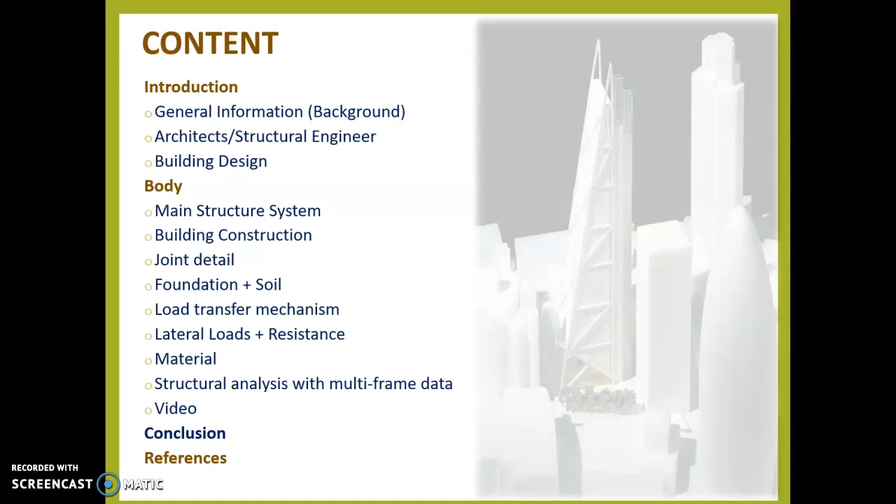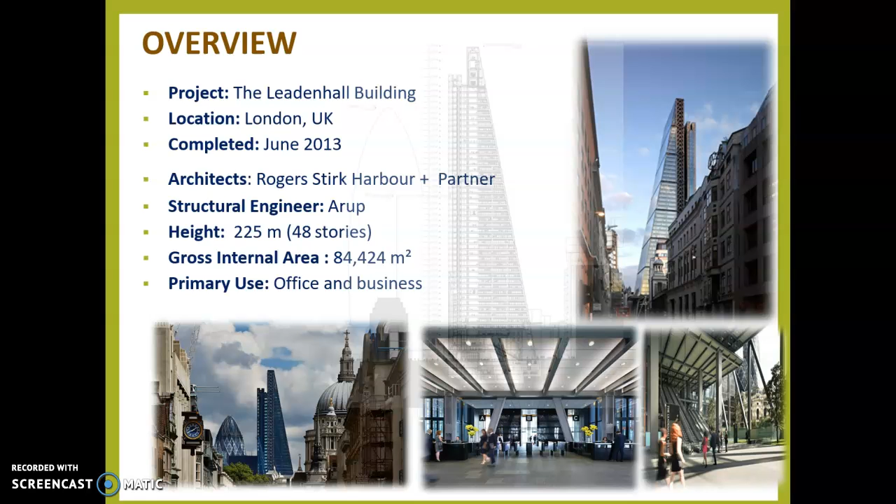It contains the introduction, body, conclusion and references. The project is Leadenhall Building, located in London, UK, completed June 2013. Architect Rogers Stirk Harbour + Partners, structural engineer Arup, height 225 meters, 48 stories, gross internal area 84,424 square meters. Primary use is offices and business only.

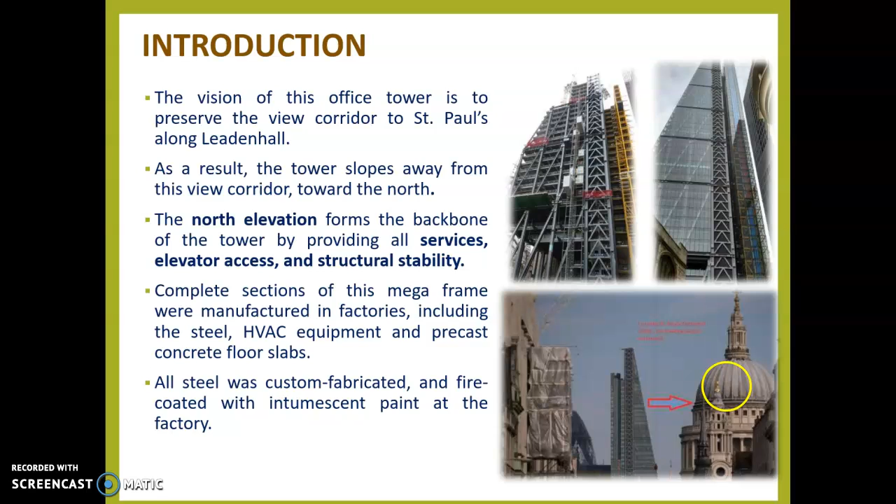The introduction includes the north elevation, which forms the backbone of the tower by providing all the services, elevator access, and the structural stability. The vision of this tower is to preserve the view corridor to St. Paul's along the Leadenhall. So you can see this is St. Paul's, and this is our building.

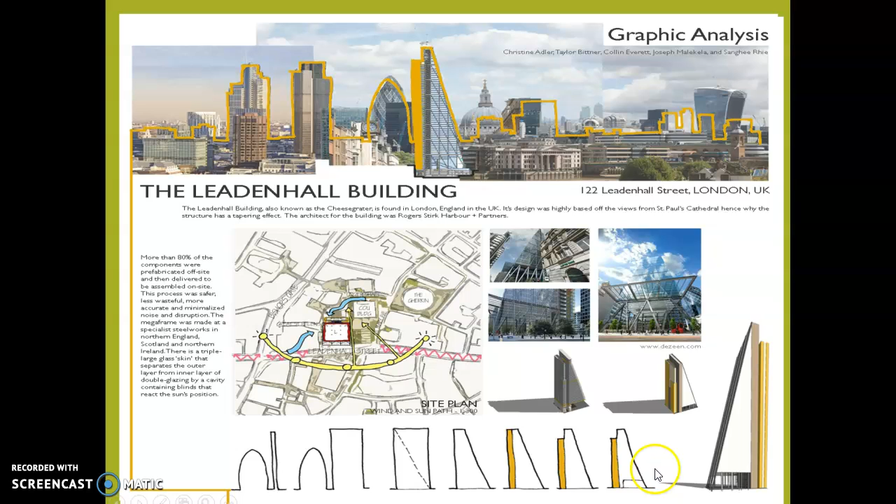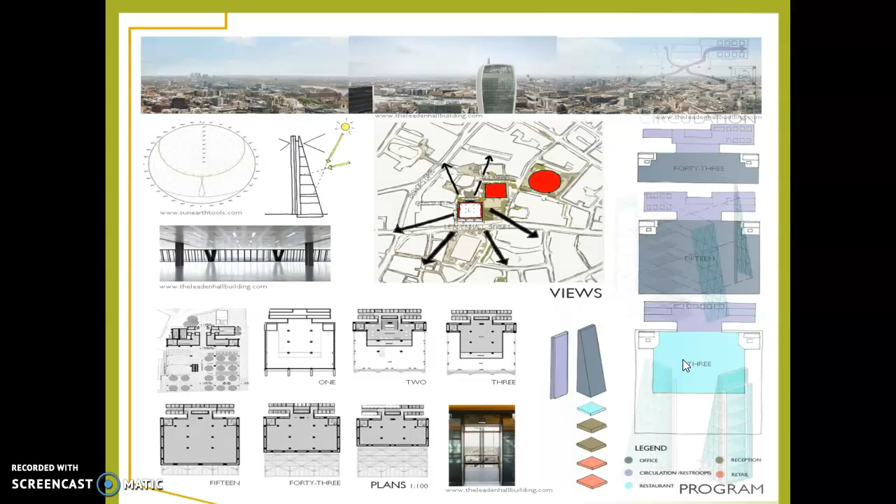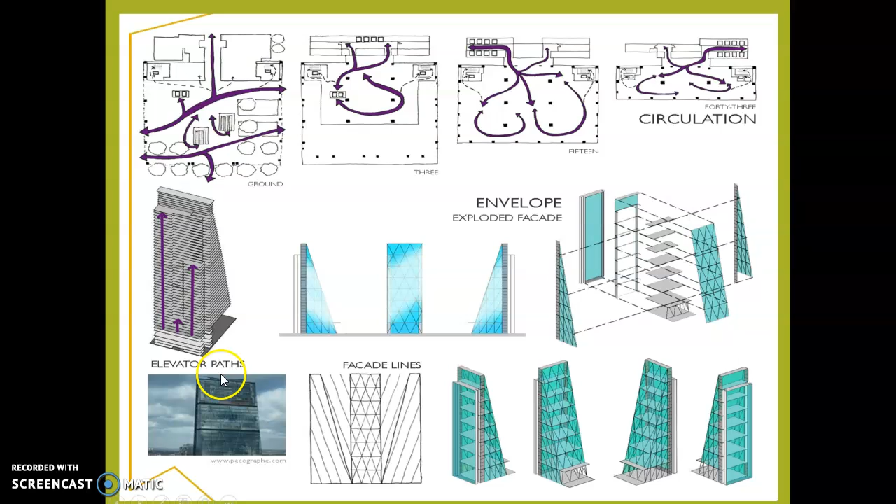This is the exploded facade of the main building, made up of glass and steel. This is a 3D view of it, and these are the elevator paths, like lifts, and the movement of the lift moving upwards. All this glass facade is used in it.

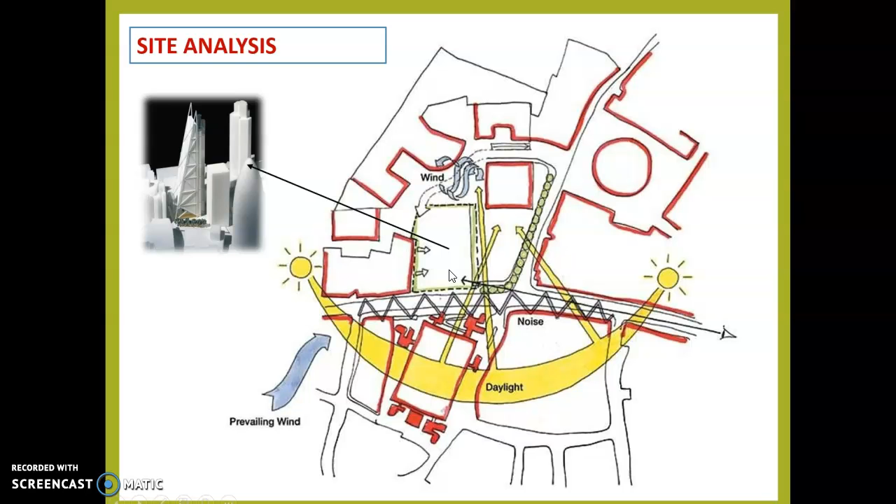This is a site analysis showing daylight and prevailing wind, and this is noise coming in and striking towards the plants situated here, which reflects back to sound. This is the main model of it.

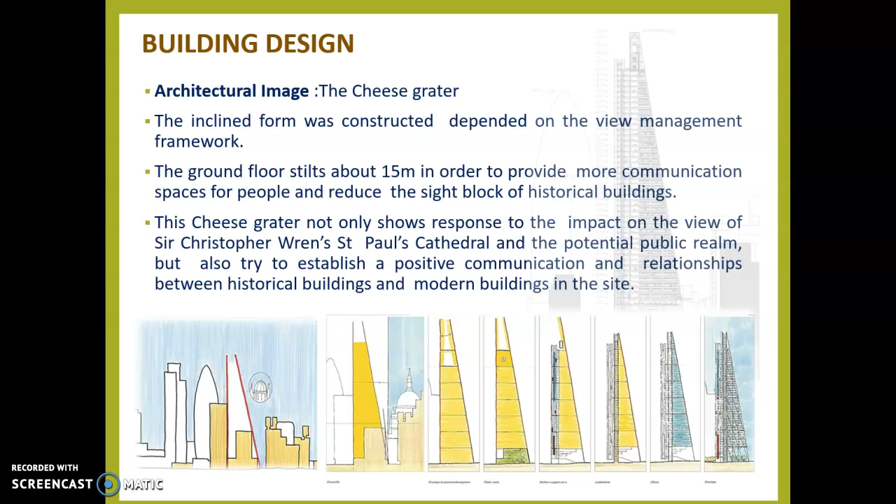Talking about the concept of the Cheese Grater, it has a simple concept that evolves into trapezium shapes, leading to the structural analysis. It has potential public realm but also tries to establish a positive communication and relationship between the historical building and the modern building on the site.

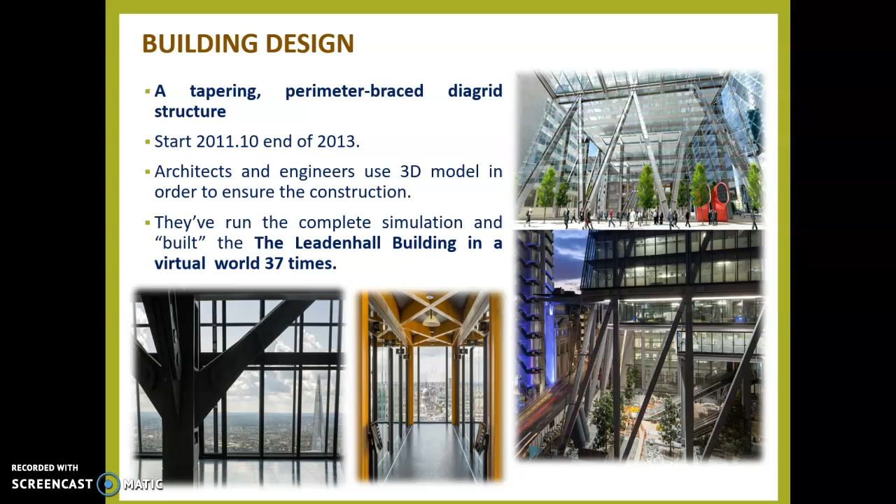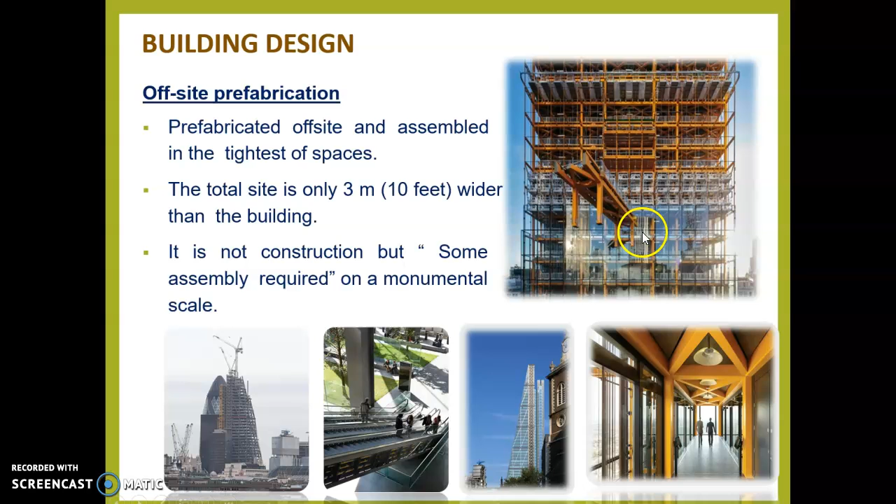Offsite prefabrication is included. The total site is 3 meters wider than the building, giving it a tough, monumental scale.

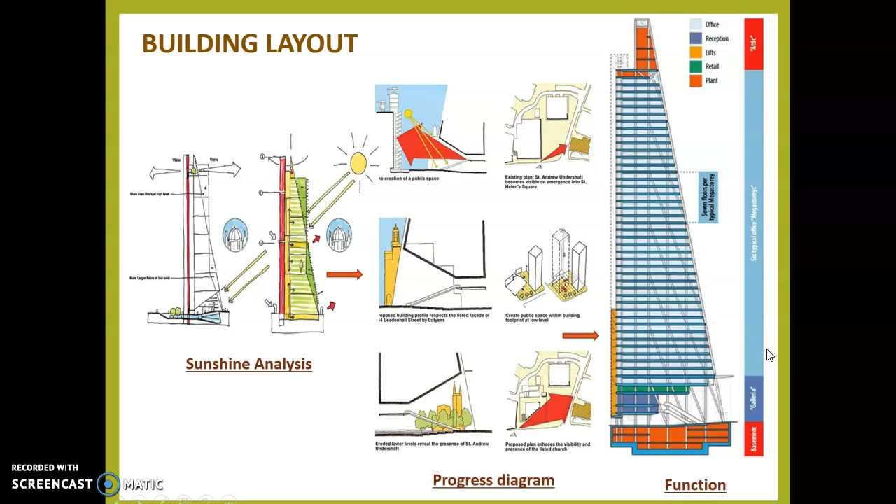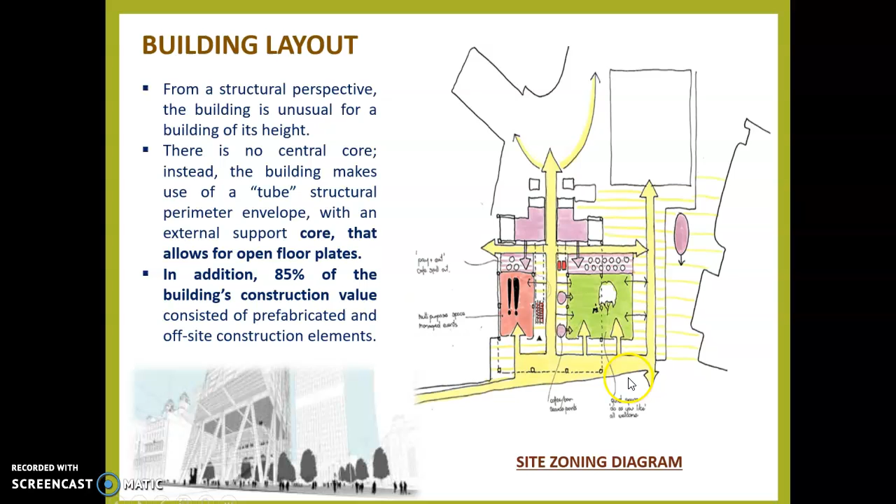This is the site zoning, showing a cafeteria area and a public multi-purpose hall, with a cafeteria for sitting together. In addition, 85% of the building's construction value consists of prefabricated and offsite construction, as discussed in the previous slide.

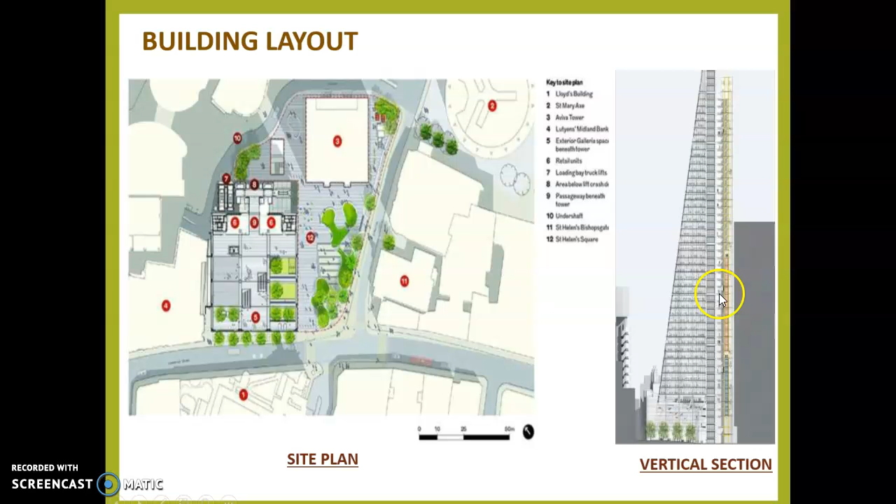This is a site plan, and we can see a vertical section showing the monumental structure core, the north core, and all the buildings included in this.

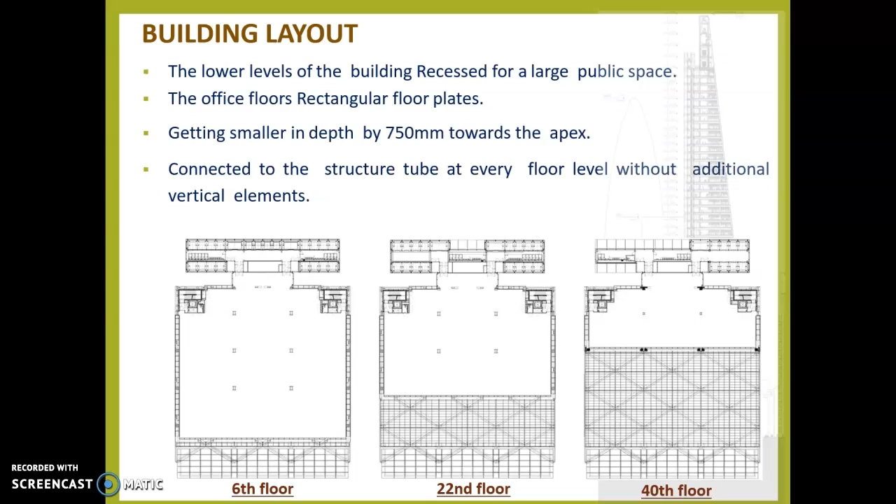These are the plans of the 6th floor, 22nd floor, and 40th floor plans, which include getting smaller in depth by 750 mm towards the apex.

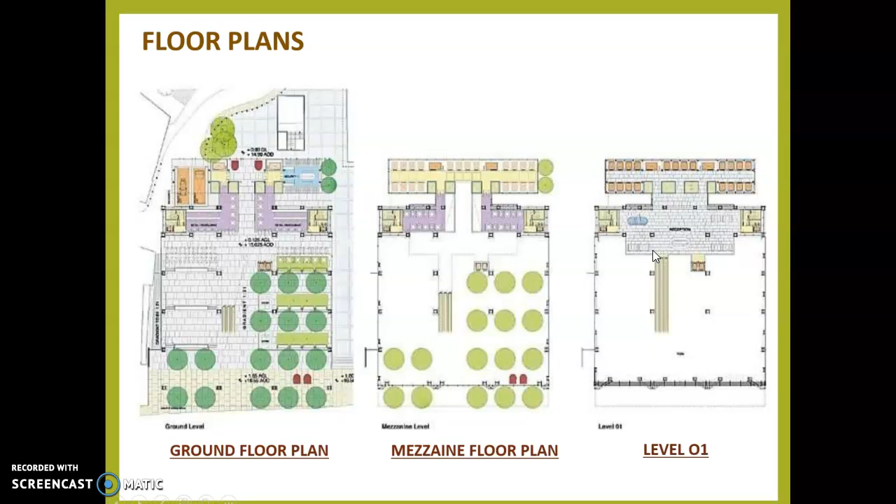This is the ground floor plan that includes the cafeteria, sitting area, and plants included in this sitting area, cafeteria, headquarters, office, and terrace for the public to see outwards.

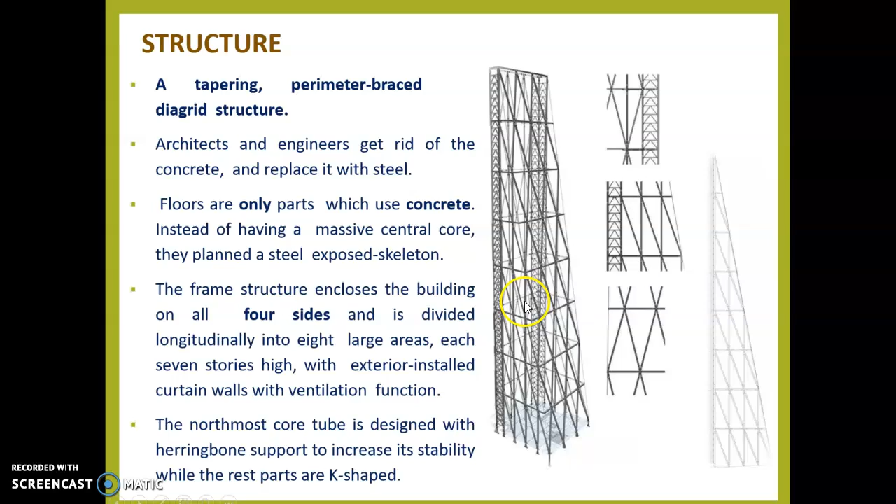Now we were talking about the structure, tapering perimeter braced building structures having all 4 sides, divided longitudinally into 8 large areas, each having 7 stories high, with exterior installed curtain walls with ventilation function included, and it also includes K bracing.

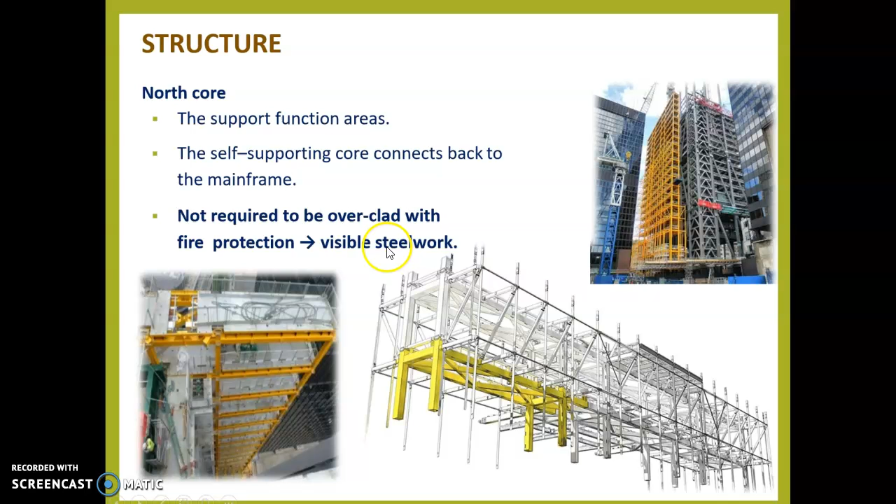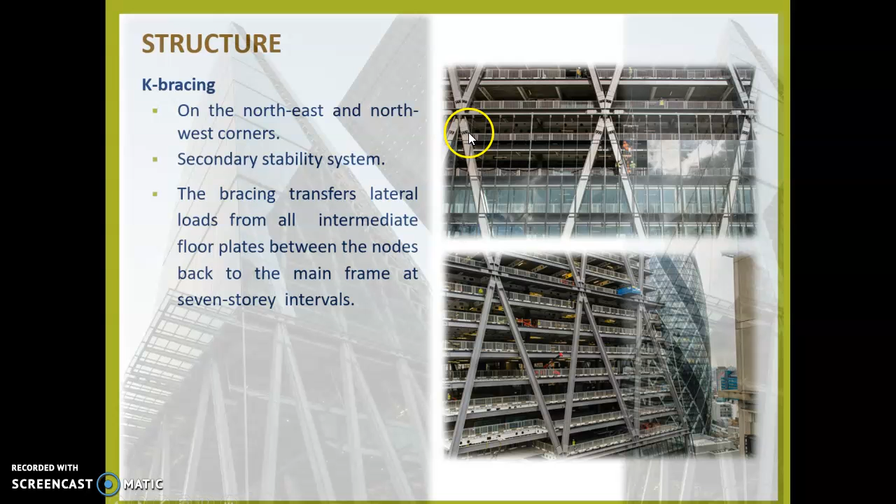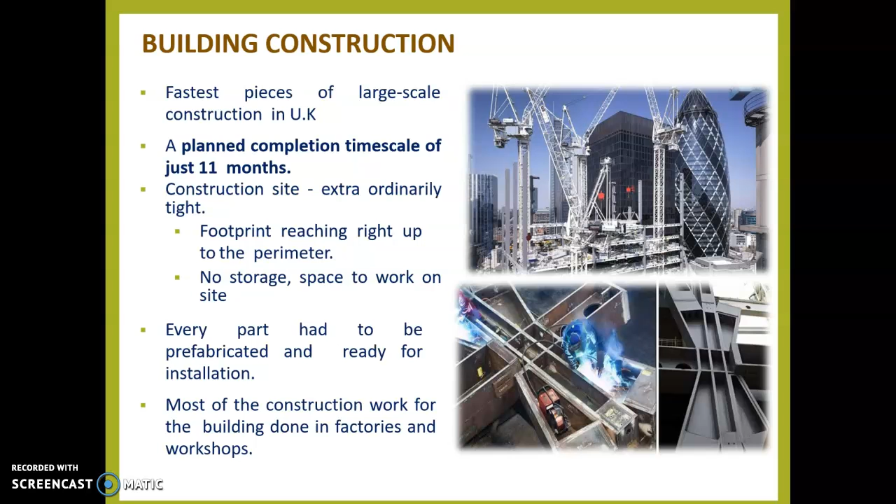We can see in these pictures that it leads to the 7 stories only. Now for building construction, the footprint reaches right up to the perimeter, so no storage space on the site can be visible.

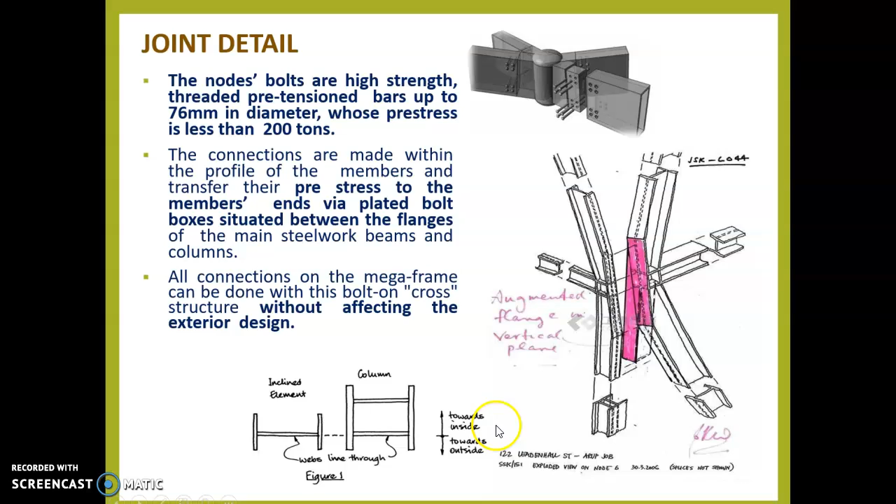There is a joint detail that can be seen, with at least 600 tons in 3 different directions mentioned here. There are nodes having high strength pre-tension bars of 76mm diameter with less than 200 tons, and this is the column. This is an inclined member going towards the inside and towards the outside, and this is a type of Z shape.

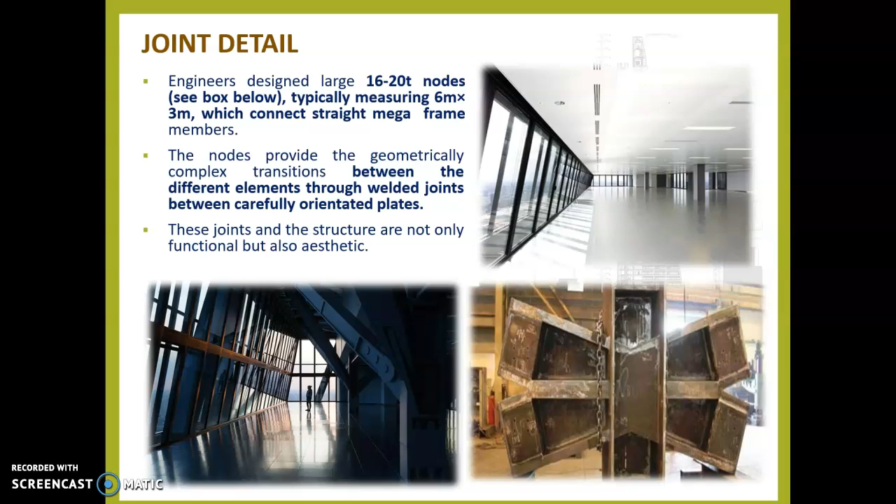Now we can see that this is a 16-20 tonne box, typically measuring 6m and 3m, which connects the straight mega frame members.

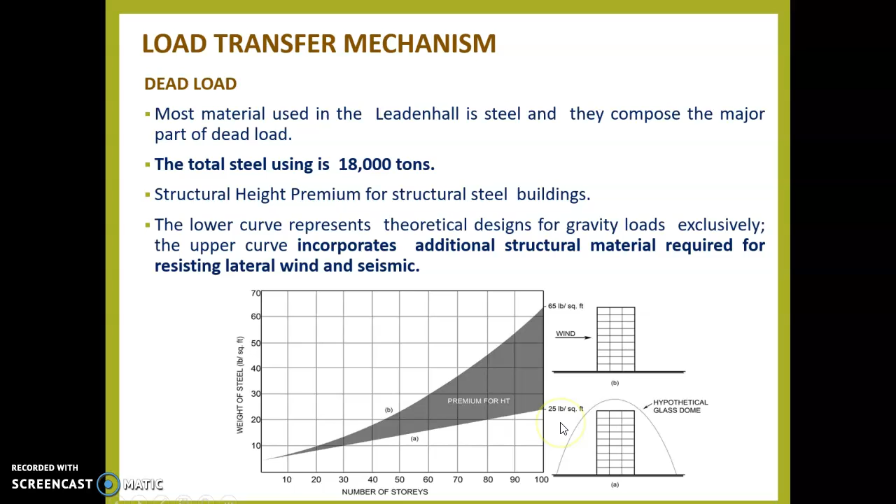Now how can the loads be transferred into this? You can see this is a gravity load in the lower portion, and this one is for the lateral, wind and seismic load, and the total steel used is 18,000 tons.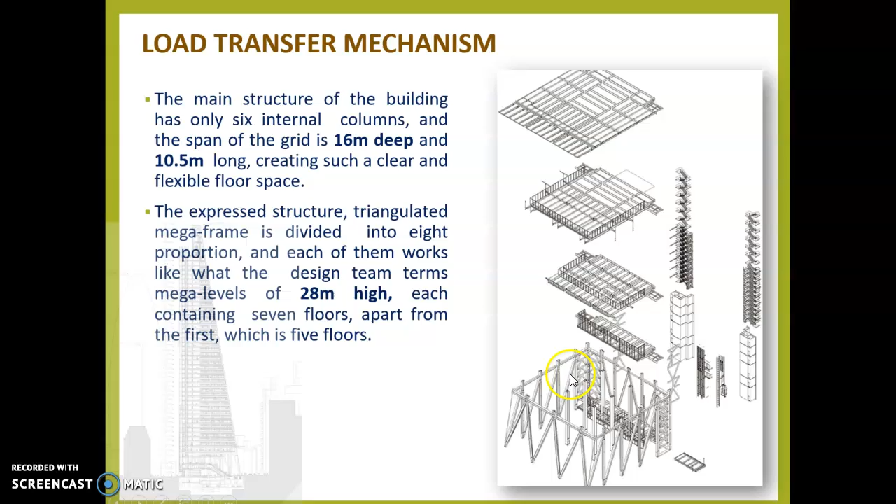The main structure of the building has a 16 meter depth and 10.5 meter width, with a height of 28 meters, each containing 7 floors and having 5 floors.

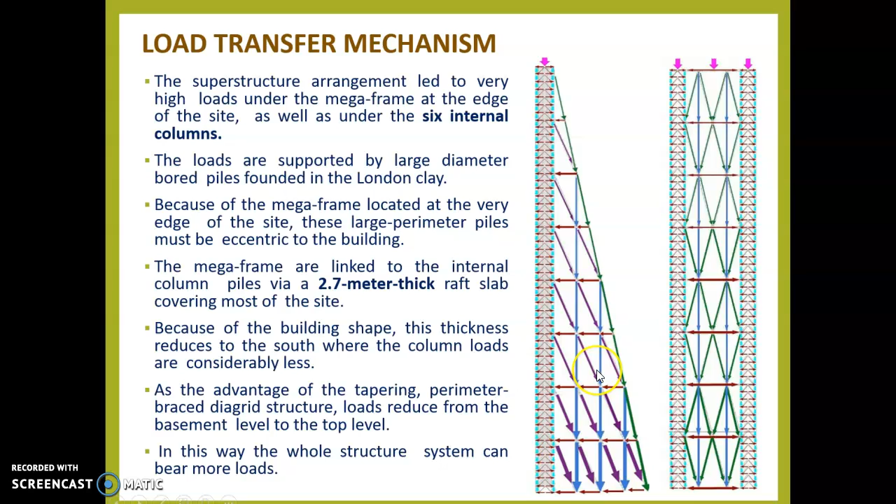The loads can be transferred downward, and this has a 2.7 meter thick raft covering most of the site.

Now in the seismic zone, you can see the zone is in London, having a seismic load of about PGA 0.02 to 0.05 in London, with a disadvantage of no shear wall.

The advantage is the exterior trussed tube. So the lateral design for wind load is mentioned in this diagram.

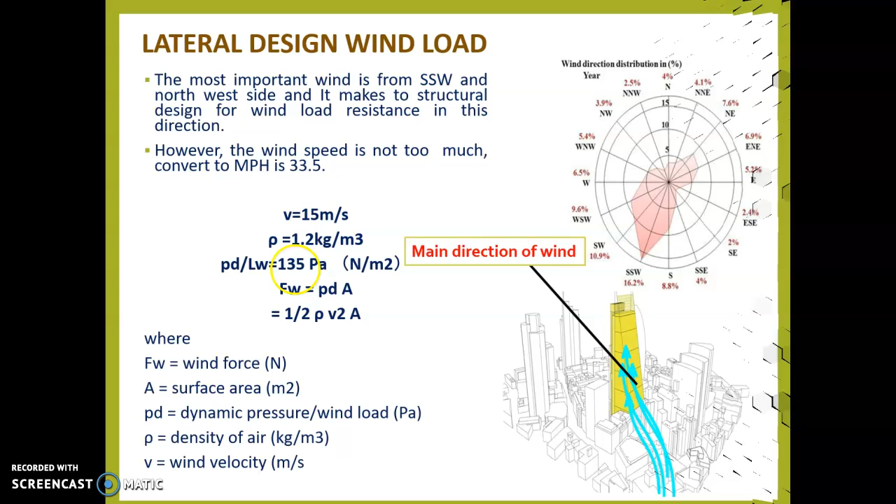This formula is for mentioning the wind direction, and this is a tapered, inward-sloped form that reduces the wind load, having only about 2%.

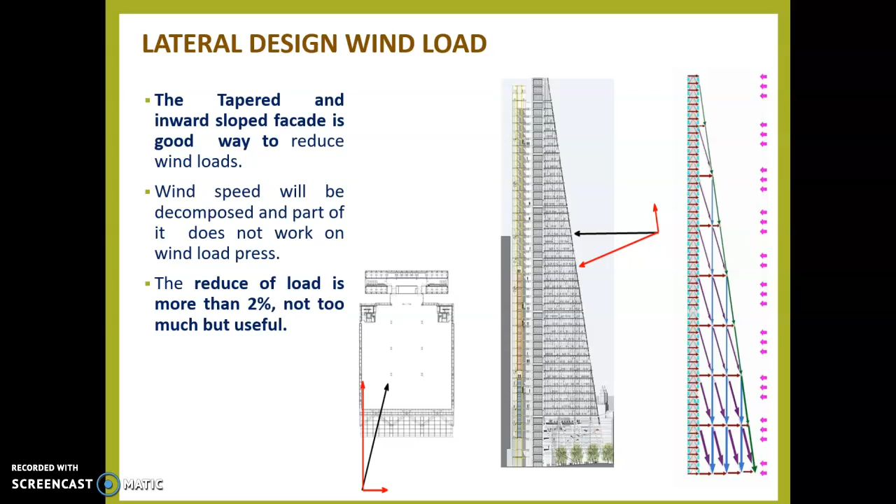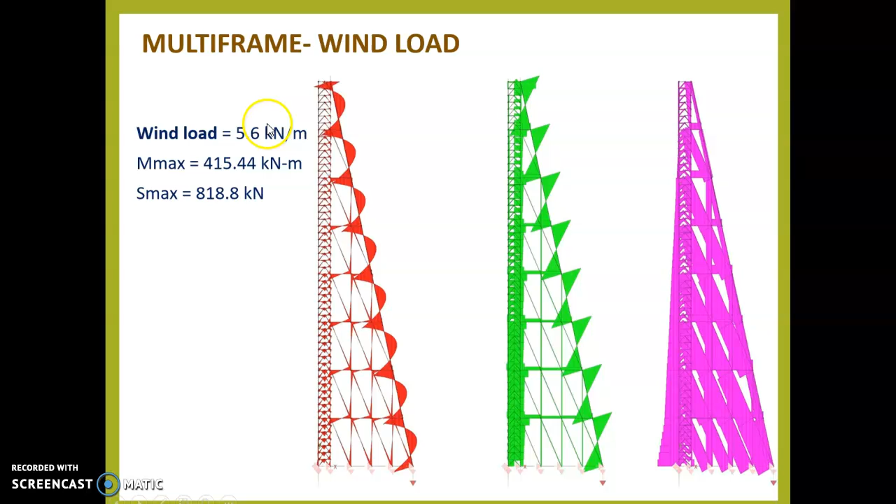Now the exterior trusses form a very rigid tube, and regarding the bonding, they have capacity only for lateral loads. You can see the wind load is 5.6, Mmax is 415.44, and Smax is 818.8. This is the wind load.

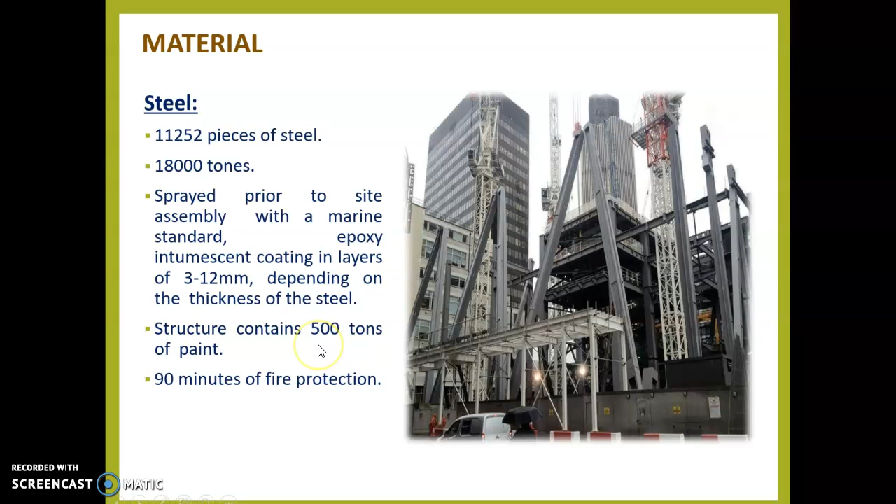Now the material used is 11252 pieces of steel, 18,000 tons, 90 minutes of fire protection, and prefabricated concrete components is 150 for the concrete slab and 700mm for the steel beams.

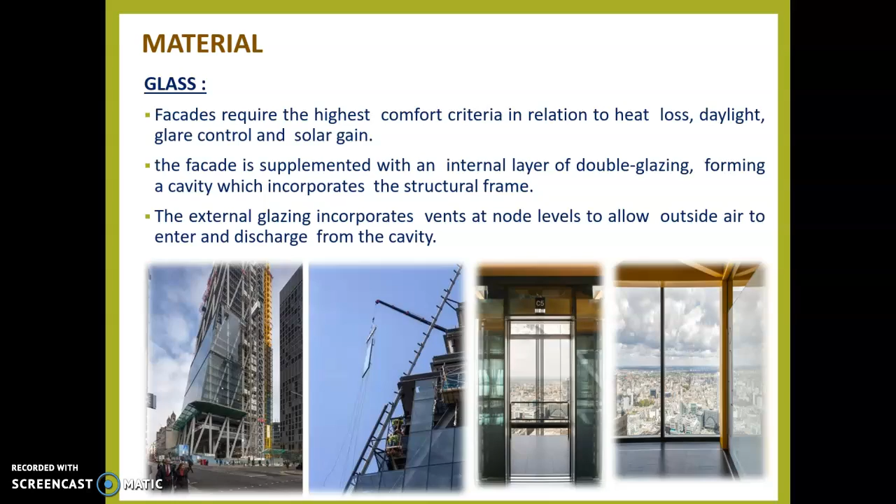Glass is used for heat loss and daylight, glare control, and solar gain only.

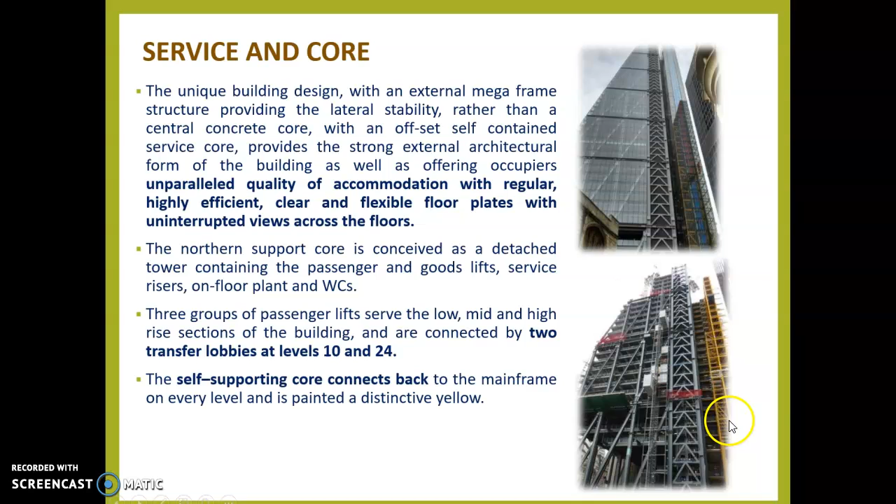Now this is the service core. You can see it has a self-supporting core connected back to the frame, and it is painted yellow.

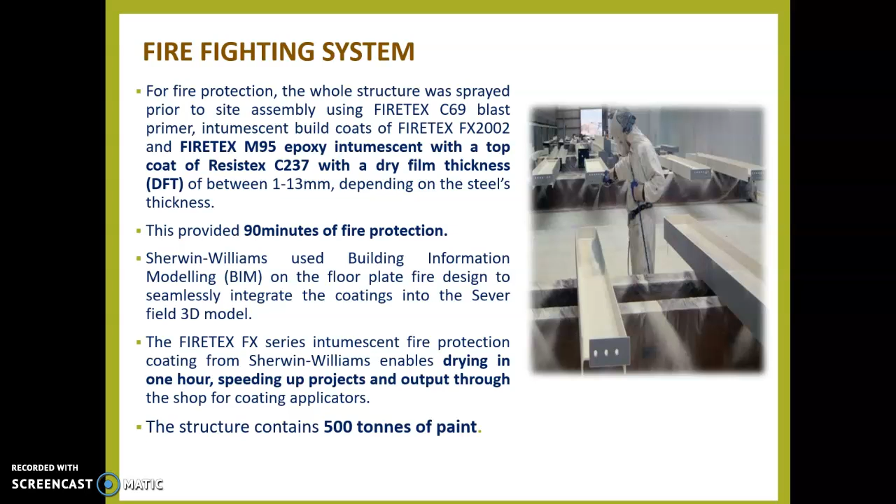For the firefighting system, FIRETEX M95 epoxy coating having the top coat Resistex for it.

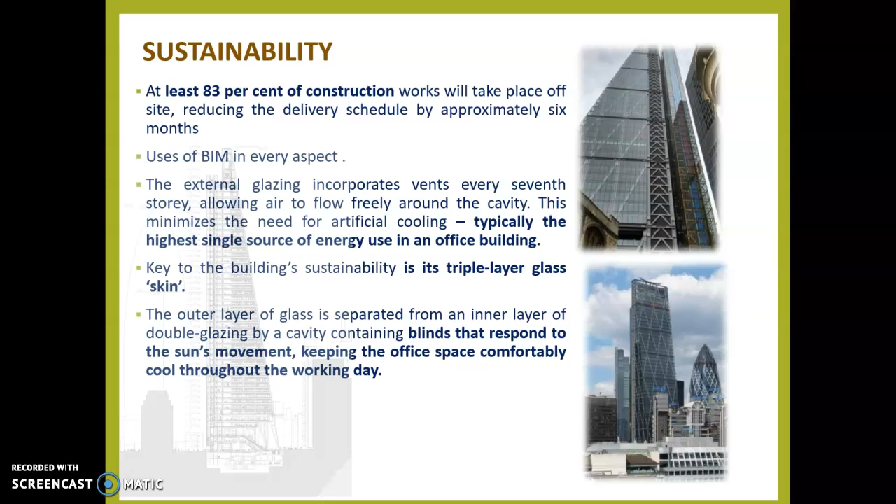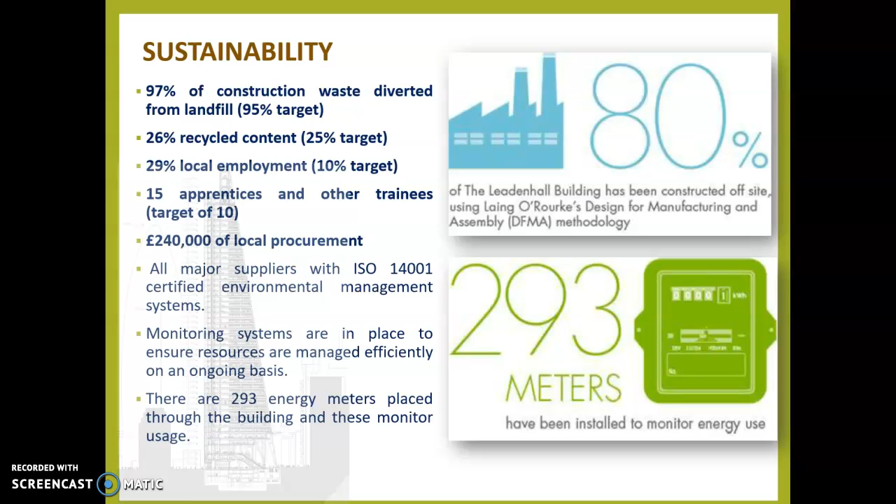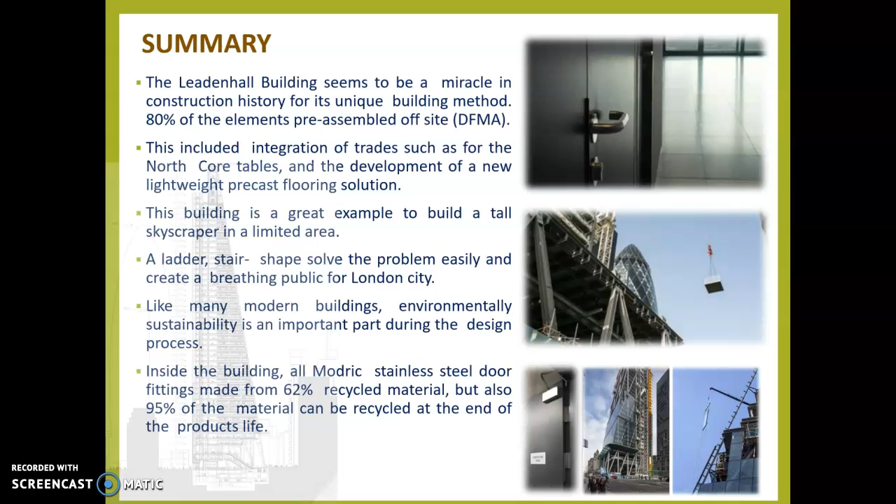Now at last there is a summary. The Leadenhall building seems to be a miracle. 80% of the elements are pre-assembled off-site using DFMA. A ladder stair shape solves the problem easily, creating a breathing public space for the London city.